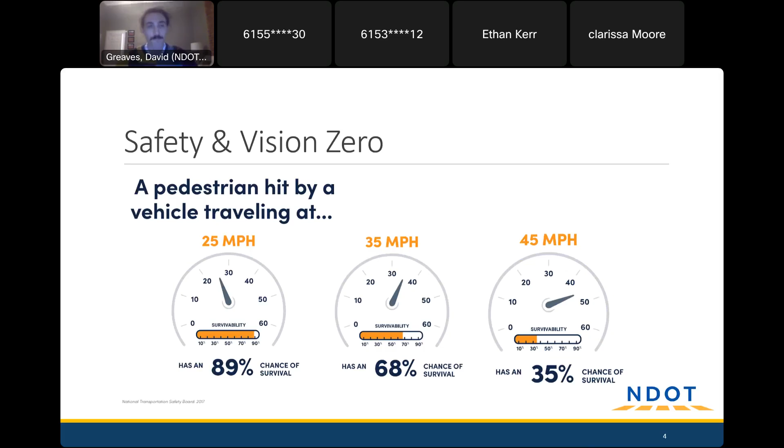So we want people to drive slower because anyone who may be hit has a greater chance of coming out of that interaction alive. This is a really popular program. When Old Matthews Road was selected, there were 480 neighborhood streets in the queue, and Old Matthews Road was part of a cohort of 25 streets selected at the same time as an additional 60.

Outside of the neighborhood street traffic calming program is Hub Nashville. So if there's anything we're not featuring in our design that you'd still like to request, this is a really good resource to know about and use. The number for that is 311, the website is hub.Nashville.gov, and there's also an app that's really helpful as well.

A little bit of refreshing on what traffic calming measures we're proposing for Old Matthews. We have speed cushions throughout the design. These are vertical measures intended to slow speeds, basically functioning as speed bumps but stretched out to target a higher speed around 20 miles an hour, rather than the really slow parking lot style speed bumps where you ought to be going closer to 5 to 10.

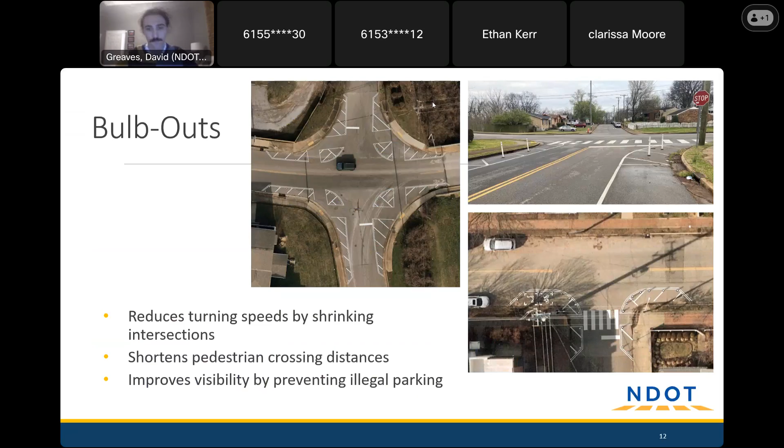Now we are going to move on to reviewing the traffic calming design we've made for Old Matthews Road. But if there's anything you have questions about that we've covered, I'm more than happy to go back—just let me know.

So what did we propose for Old Matthews? Anyone who went to the first meeting will see this design looks pretty familiar. We didn't really change anything from meeting 1 to meeting 2, because the people on that meeting seemed okay with what we were proposing. Basically, we've got 8 sets of speed cushions along the entire length of Old Matthews.

There's 1 radar feedback sign at both the beginning and the end, and then there's a set of bulb outs at the intersection of Old Matthews Road and Combs Drive. The reasoning is it's our 4-way intersection in this neighborhood. It had a good amount of pavement that wasn't necessarily necessary for proper turning movements, and from aerial imagery and comments from residents, it sounded like people were using that space to do donuts, which is obviously neither safe nor preferred for the folks that live in this area.

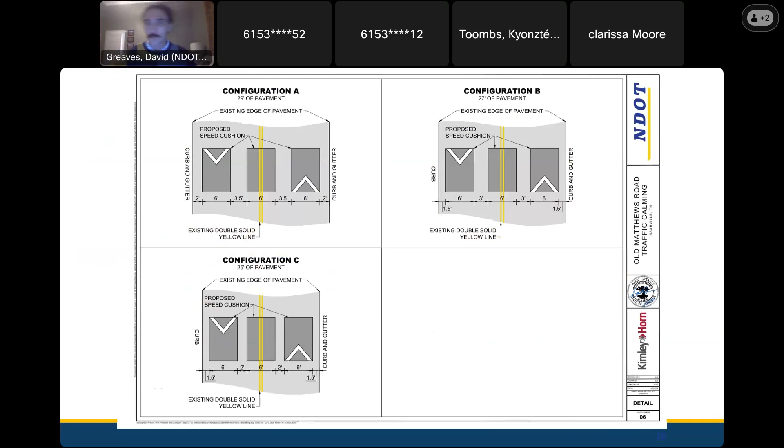Any other questions on the plans? Next, we can take a look at the flow chart and then answer any other questions about the balloting itself. But I want to make sure we cover everything we need to on the design.

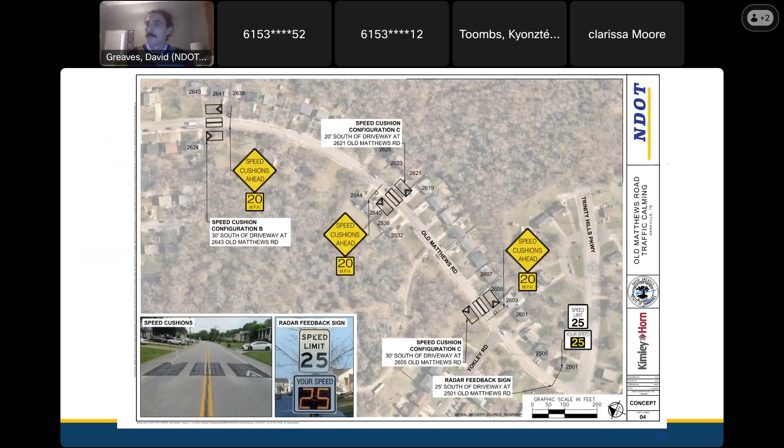Sounds like not, so I'll go ahead and talk through the next steps. We've covered this briefly already, but essentially we have our construction plans in hand. Next thing on our end is to send them to NDOT to post onto the website. Then we will send out ballot postcards, and they will each have a unique ID.

That voting period will be open for 6 weeks. We like to leave it open for a little bit of time just to make sure everyone has the opportunity to vote, especially if their postcard got misplaced. So if you'd like to vote and think you should have received a postcard but haven't, you're welcome to reach out to us and we can get you set up with your ID.

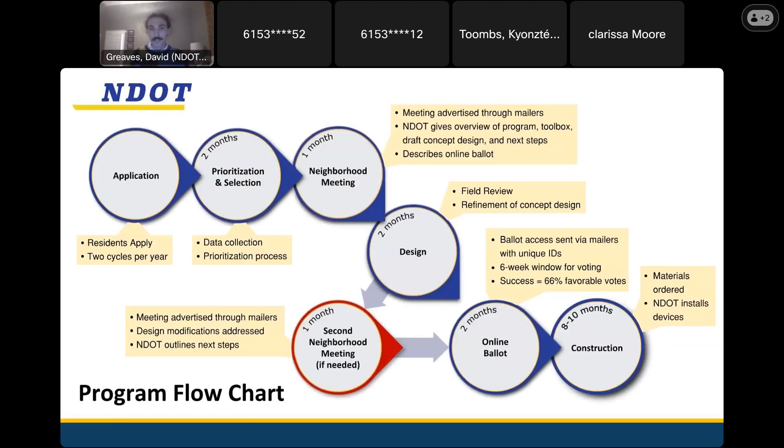After the online ballot, if it is successful and passes, we'll put it into the construction queue. That'll be when we order the materials, get the work order put together, and then wait for installation. That period right now is about 8 to 10 months, which is a while. It's not because these take a long time to construct, it's just that there are a lot of other traffic calming projects in line ahead of Old Matthews.

Okay, so it looks like we covered balloting pretty well. So a little bit about the ballot zone and eligibility for voting. Essentially, any residential properties, churches, or schools will all get one vote. Only the properties abutting the affected right-of-way are eligible. We do have a couple of dead ends, cul-de-sacs offshooting from Old Matthews, and those do not have property lines abutting the right-of-way.

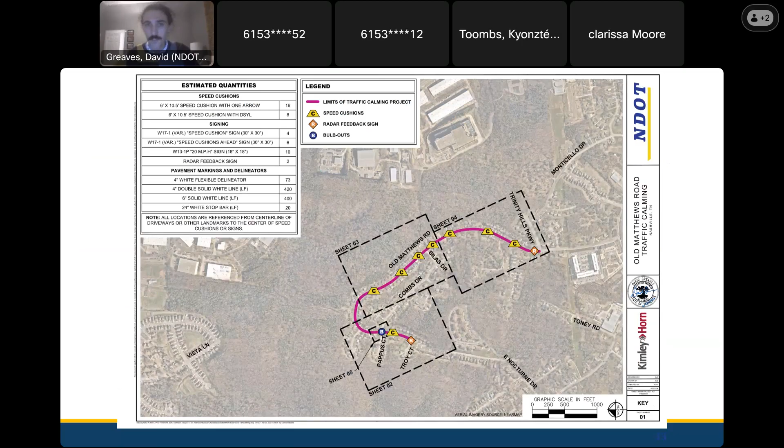This is Vicki Taylor, just to go back over what you said - the beginning is at Trinity Hills Parkway, goes around to Troy Court, and at both of those locations you're projecting to put the radar signs and then 8 sets of speed cushions on Old Matthews Road. That's correct, between Troy Court and Trinity Hills Parkway. We generally stuck to the straighter and flatter portions of Old Matthews Road. We know there's that kind of hilly, sharp curve halfway in between - that's the only place we weren't able to find a suitable position, but they're otherwise distributed pretty evenly.

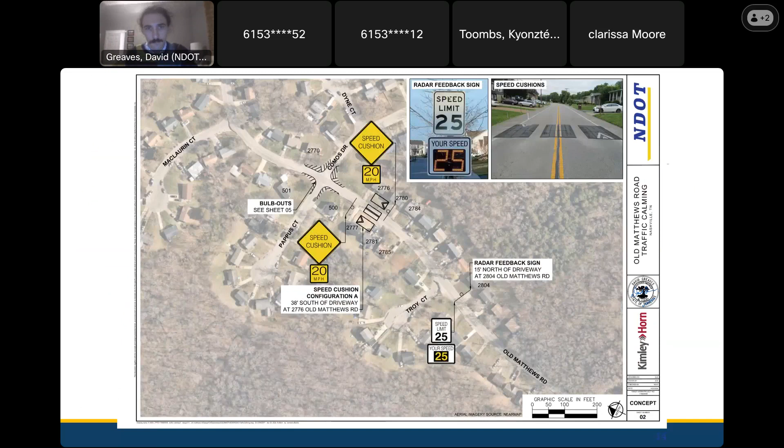Okay, and then the bulb-out at Old Matthews Road and Combs? That's correct. Okay.

So we're still looking at maybe about a year, up to 12 months? Yeah, thereabouts. It's entirely possible the pace will pick up between now and then, but right now we're projecting between 8 and 10 months for construction time, plus that 6 weeks of balloting.

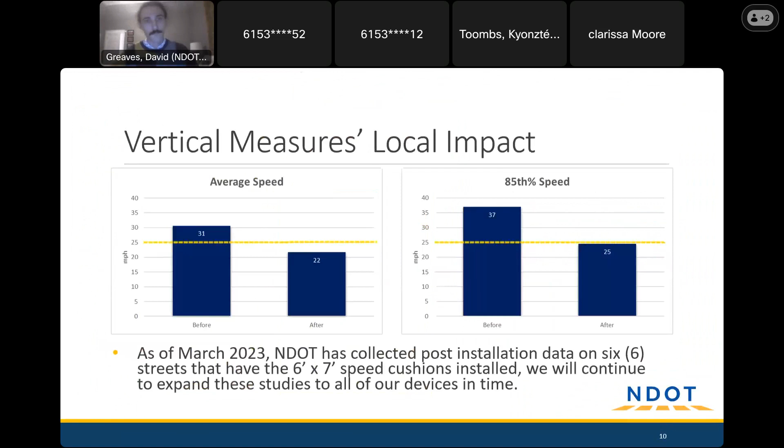And what's the research as far as emergency vehicles coming through when there are speed cushions - is there no slowdown on trucks or ambulances? That's a great question. Basically, the fact that these are speed cushions and not tables is designed to minimize the impact to emergency vehicles. These are 6 feet wide, which is wide enough that smaller personal vehicles have to go over them with either 1 or 2 sets of wheels, while much wider wheelbases like you'd find on a fire truck or an ambulance are able to go over them more quickly without slowing down significantly to address emergencies. So this is a program that emergency services and the fire department are wholly on board with, and everyone is very comfortable with their use.

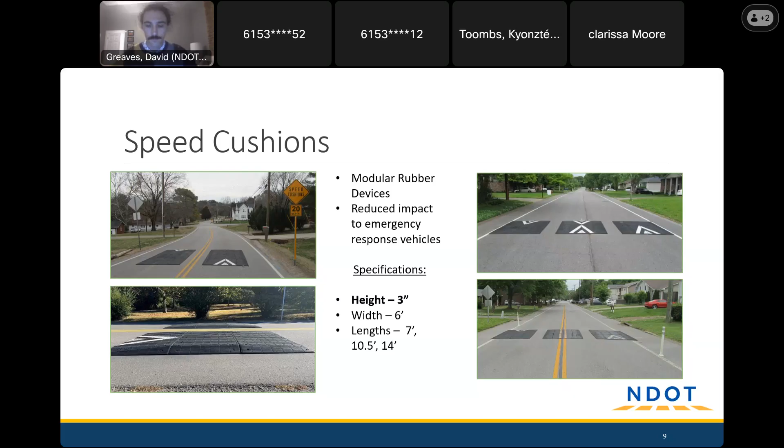Okay, that's good. Any other questions?